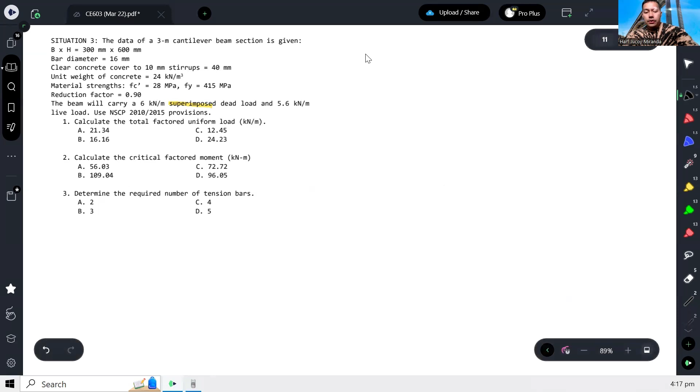So we just need to factor it, right? There's live load and dead load here. Take note, our dead load is superimposed, meaning the self-weight of the beam is not yet included. So we need to get the beam weight first. That's gonna give us 24 times its area, which is 300 by 600.

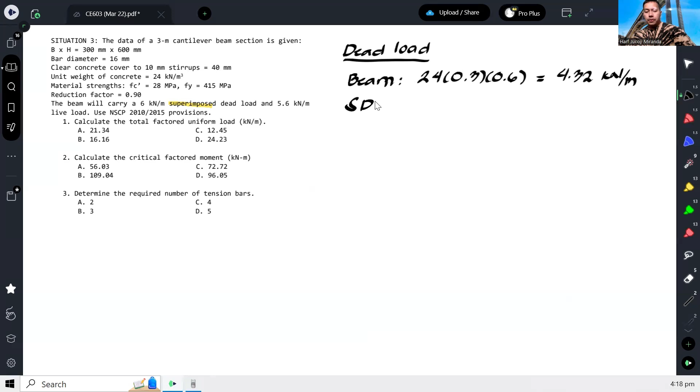So that is 4.32 kilonewton per meter. Then the superimposed dead load given is 5.6. So therefore, the total dead load, if you add them, we will have 9.92.

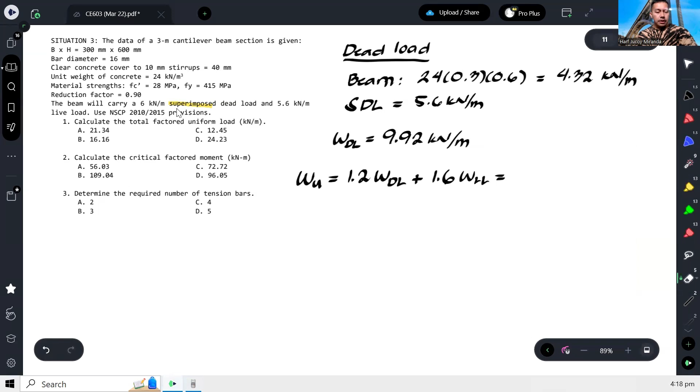Okay? So that's settled. So therefore, our ultimate load will be 1.2 of the dead load plus 1.6 of the live load. Sorry, let me correct this. The dead load is actually 6, not 5.6.

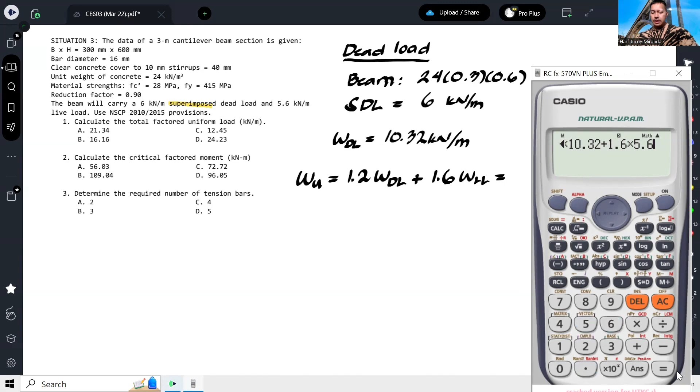So this is 10.32. And our live load is the 5.6. So that gives us 21.34. So that will be our answer for number 1.

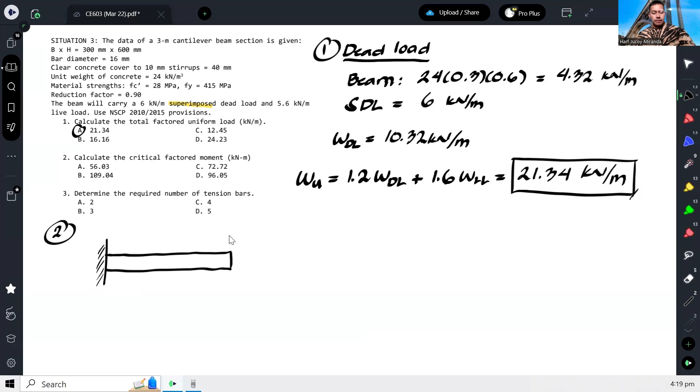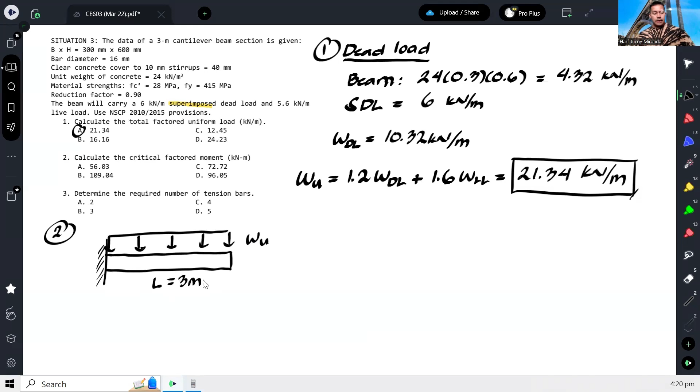Number 2, calculate the critical factored moment. So since this is a cantilever, we have our ultimate load here, with a length of 3 meters. So the moment here would be the maximum moment.

And that would be equal to WU times L. Then the moment arm from there would be L over 2 times L over 2. So for a cantilever, the maximum moment is WU L squared over 2. So we have, our L is 3 meters, so this times 3 squared over 2.

So that gives us 96.05 kilonewton meter.

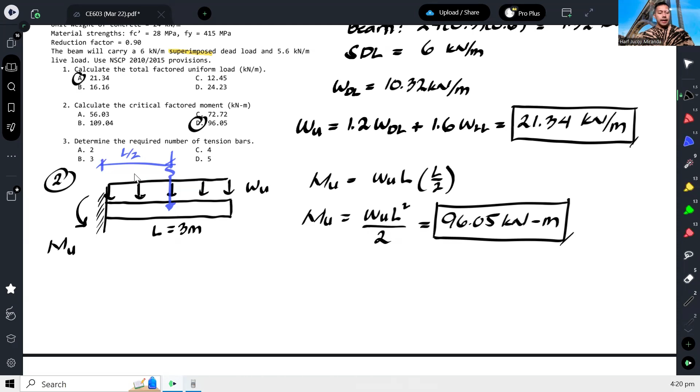And lastly, number 3, determine the required number of tension bars. So now we design, since we already have MU, we can proceed with the design.

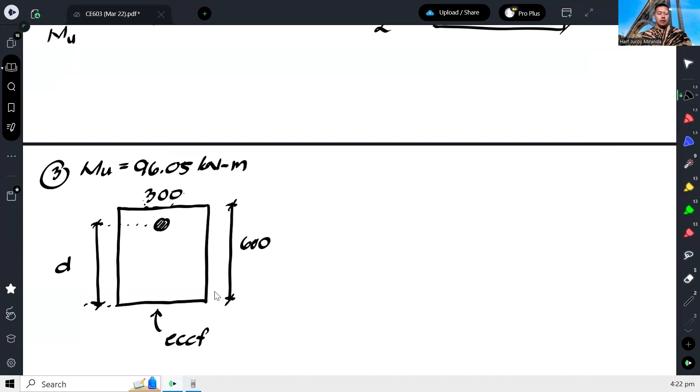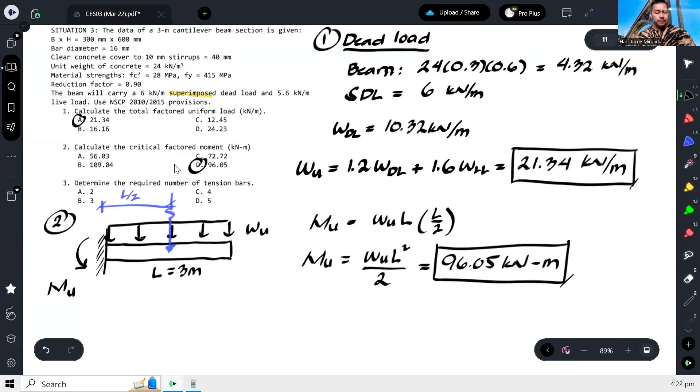Okay, so let's get the effective depth. The effective depth is total depth minus cover minus stirrups - wait, it's 10 mm stirrups, not 12. Then the main bar used is 16, so 16/2. So the effective depth would be 542.

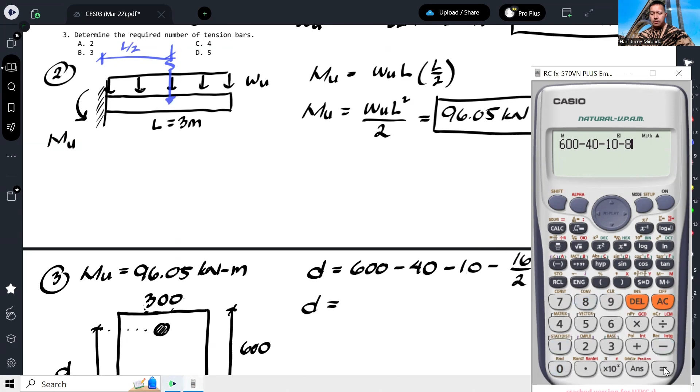Okay, so therefore, we can now proceed with the design. We will attempt to design this as singly reinforced. Let's check later if it really is singly reinforced. So we will have MU, and equate it to phi MN.

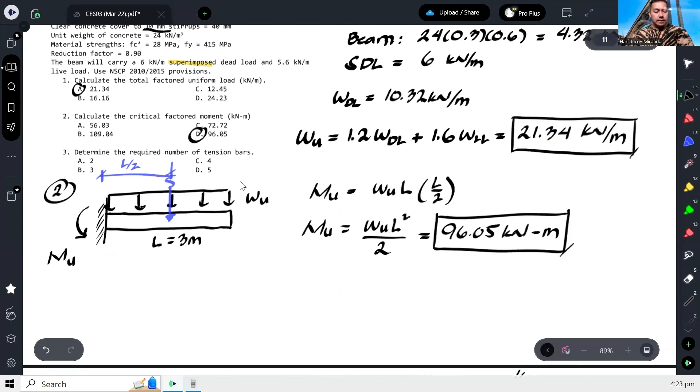Okay, this is 96.05 million, equals 0.9 since we're designing. Then we'll use the concrete formula: 0.85 FC prime - is it 28? Okay, 28, FC prime is 28 - times A, times B, times D minus A over 2.

Okay, and from here, we can solve for the depth of the compression block. So again, here's what I'm doing - it's quadratic. We have 0.5, then negative effective depth, then all the constants on the other side. So one of the answers here could be 28.32.

Okay, now let's check if we exceeded the maximum. We have a maximum, so let's get C. C is A over beta 1. Our beta 1 here is 0.85 since FC prime doesn't exceed 28 megapascal. So we divide this, 28.317, by 0.85. This is C.

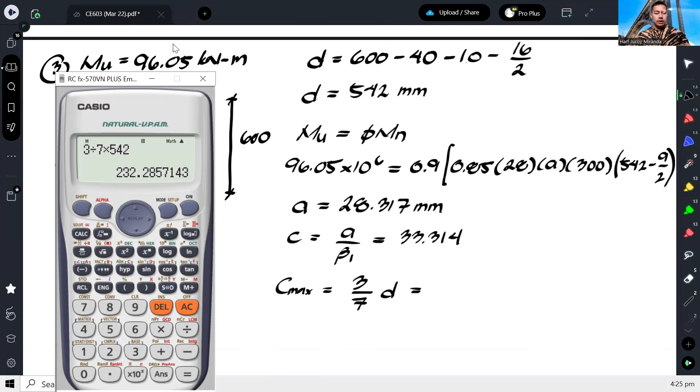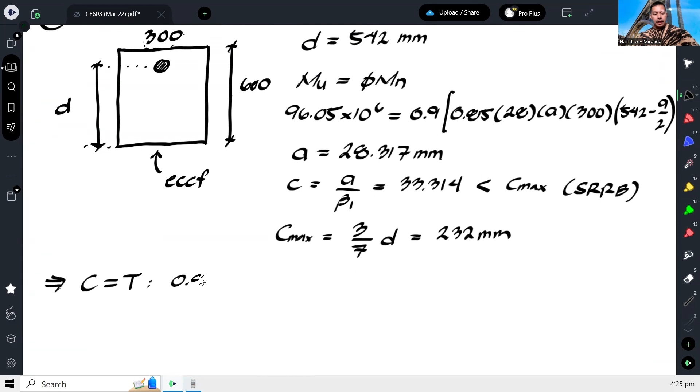Okay, so we can now proceed. So therefore, we apply C equals T: 0.85 FC prime AB is equal to area of the steel times Fy. So what we'll do here is solve for the area of the steel, which would be 0.85 FC prime A, times B, over Fy.

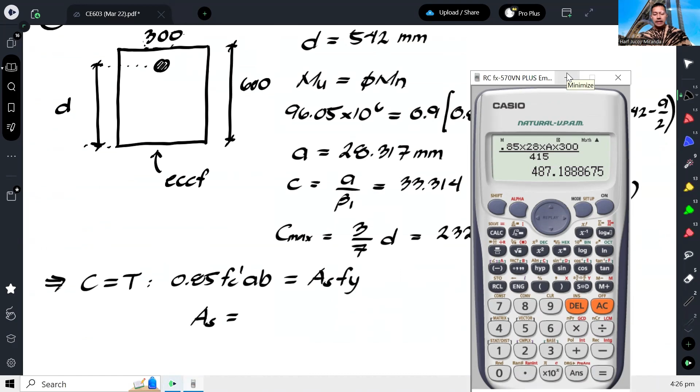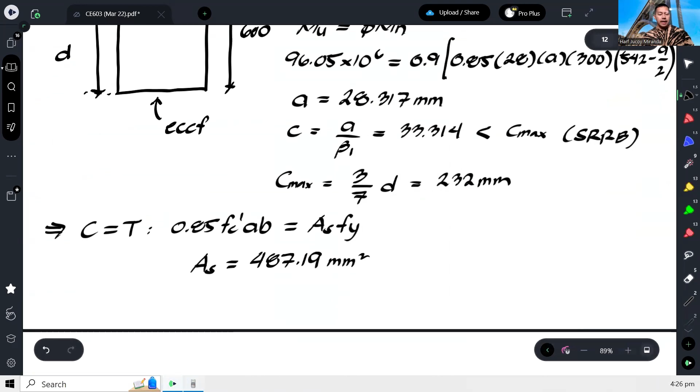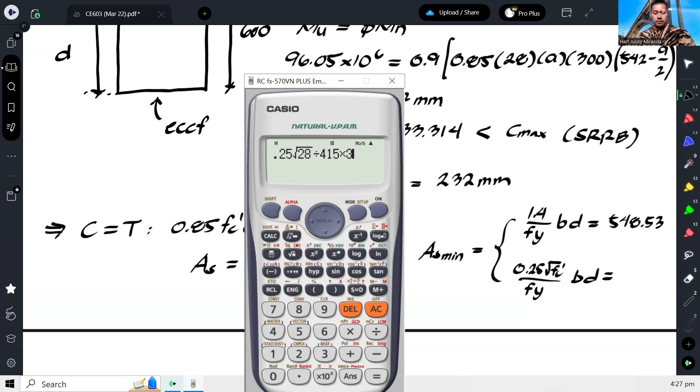Our minimum is whichever is larger between 1.4 over Fy BD, and 0.25 square root of Fc prime over Fy BD. Let's compute both. As you can see, this is larger: 548.53. Then the other one is 518, so this one is larger - actually both are larger.

Okay, so since the AS we got is lower than the minimum, we will use the minimum, which is equal to 548.53.

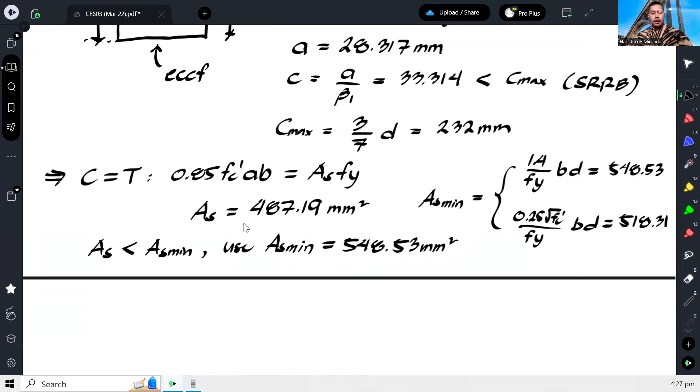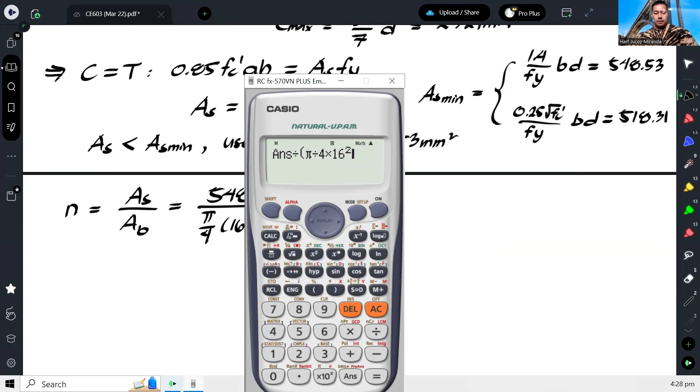Okay, so what's being asked is how many bars are required - that's easy now. The number of bars will be AS divided by area of a single bar, which gives us 548.53 over pi over 4 times 16 squared. This is what we'll use, giving us 2.73 bars, or rounding up, around 3 bars.

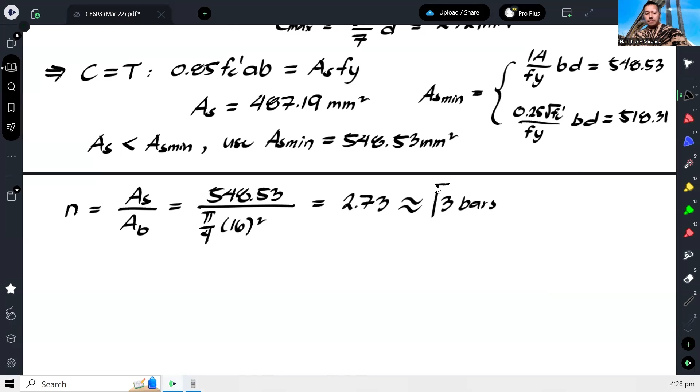Okay, so our answer here would be letter B. And that's how we solve this problem.